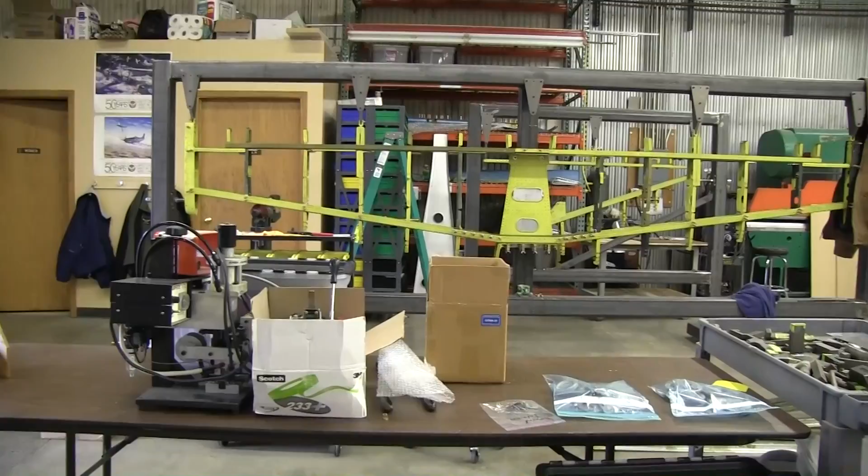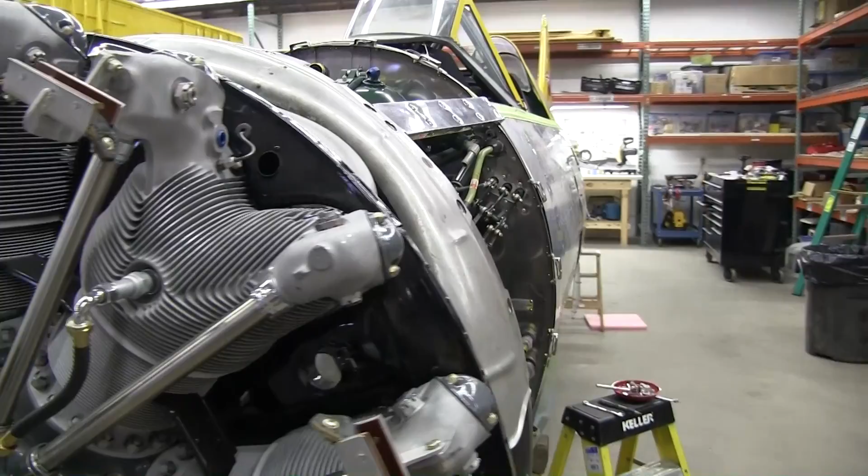During World War II, the United States became the largest producer of aircraft that the world has ever seen, or will almost certainly ever see again. On the eve of the war, the American aircraft factory was a quaint job shop, where aircraft were virtually handmade by the craft method abandoned by the American automobile factory a generation before. Within just a few years, it would be transformed into the largest single industry in the world. Among American industries, the aviation industry rose to first place from 41st place.

Prior to World War II, the American aircraft industry ranked 5th in the world, but during the war it became the global leader, producing twice as many aircraft as the United Kingdom or the Soviet Union, and 1.6 times as many aircraft as the three major Axis powers, Germany, Italy, and Japan combined.

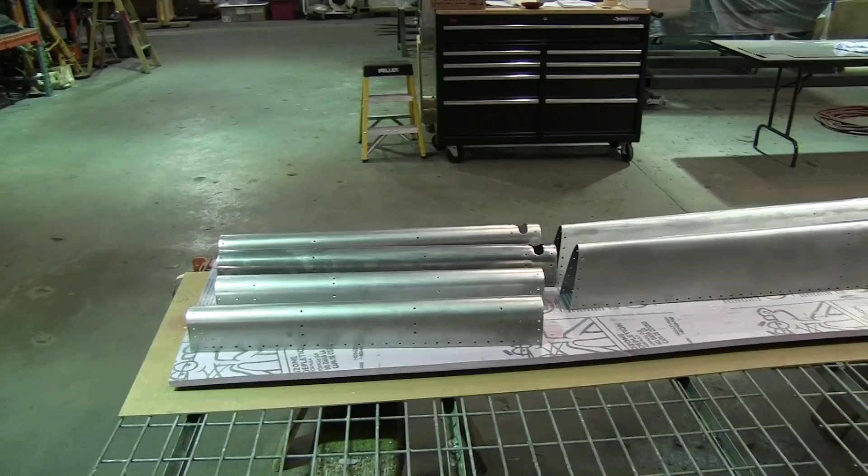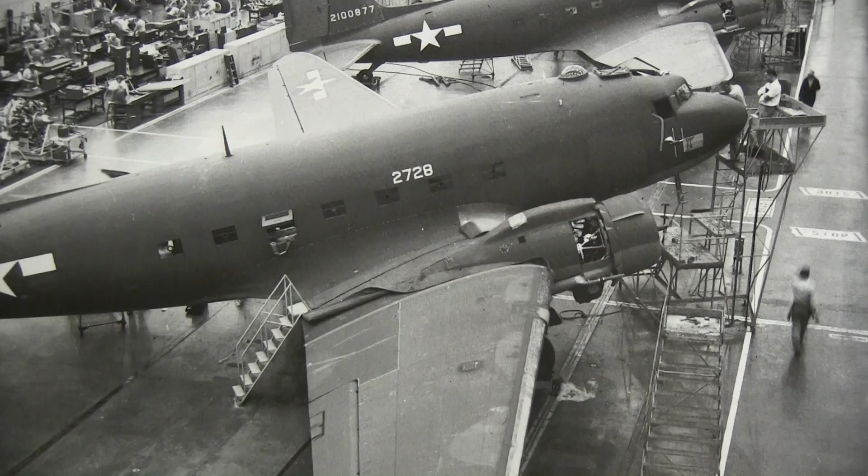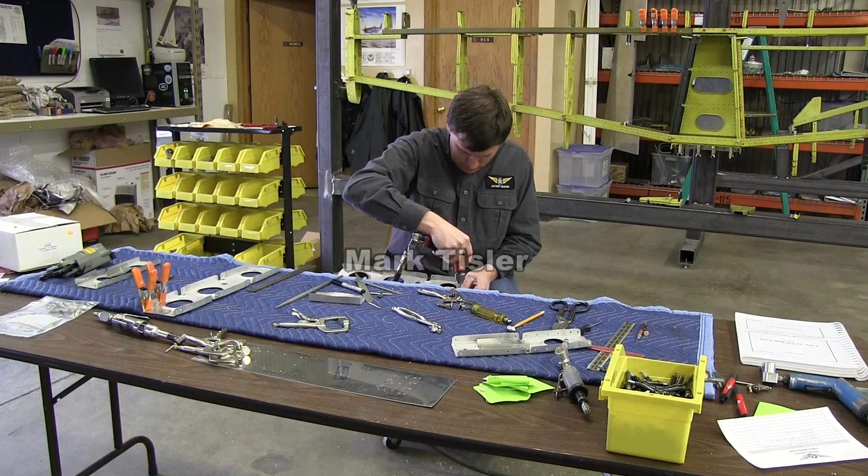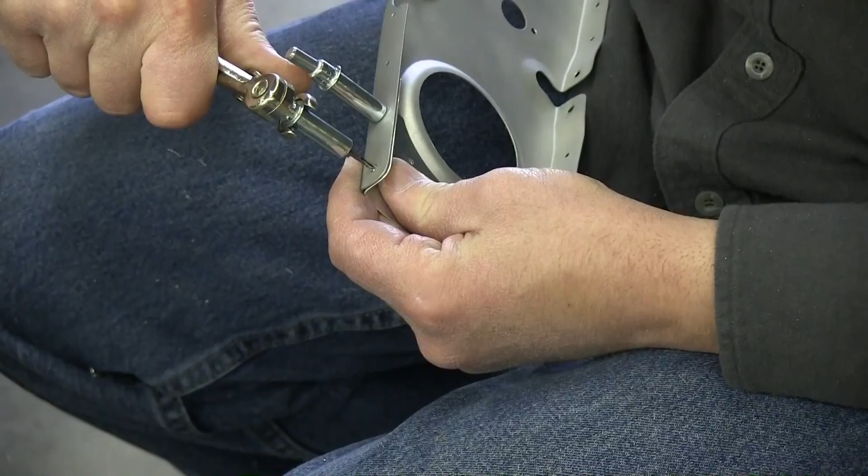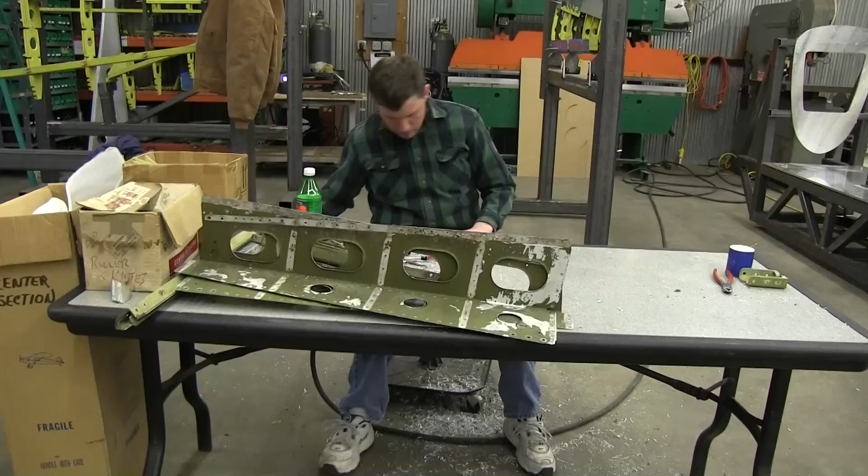First and foremost are the airframe manufacturers, which were and are the largest component of the industry in terms of employment, dollar volume, and sheer weight of their output. Second are the engine manufacturers, which were and are responsible for the single most complex component of any powered aircraft. Third are the subcontractors that provide some assemblies and components. Finally, there are the vendors of accessory and small parts, from rivets and cables to turrets and shock absorbers.

During World War II, the largest airframe manufacturers in the American aircraft industry were Bell, Boeing, Consolidated Vultee, Curtiss, a component of Curtiss-Wright, Douglas, Grumman, Lockheed, Martin, North American Aviation, and Republic.

What is the machine behind you? CNC mill. CNC mill? CNC? Yep. What do you use it for? To mill out parts. Mill out parts. Yep.

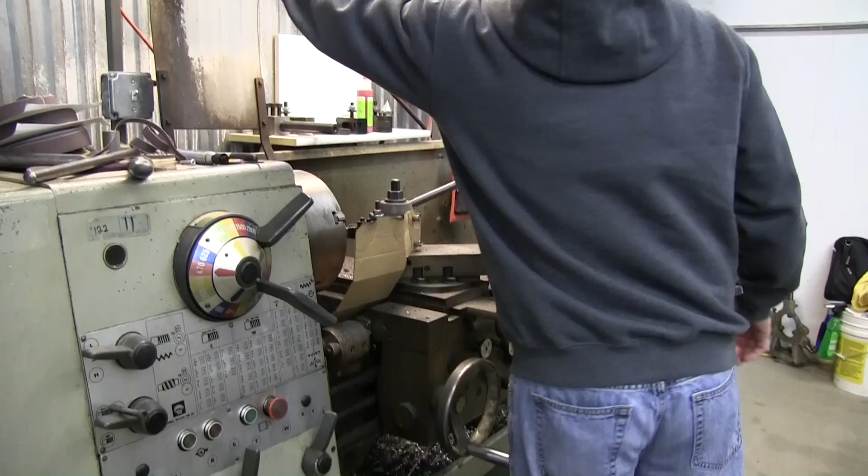The Aircorps Aviation refurbishing facility is located in the industrial park of Bemidji. They would have liked to have gone to the Bemidji airport, but at the time when they needed the space, there wasn't any available at the airport, and today there still isn't. So they're at the industrial park. The plan is someday to move out of the industrial park and be located over at the Bemidji airport. Then they can leave the wings on at least. Otherwise they have to truck it over to the industrial park with the wings off.

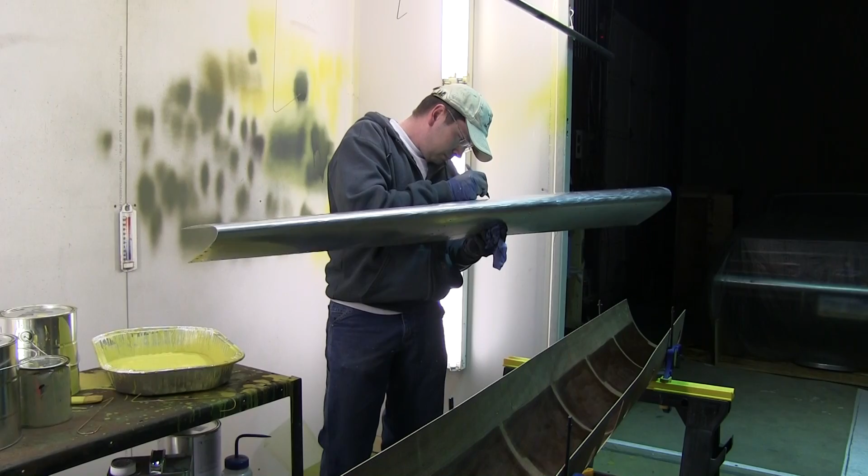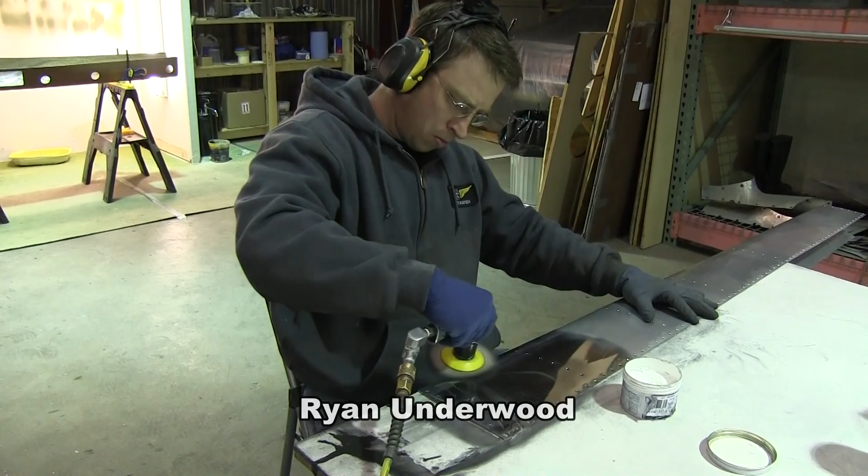What are you checking for? One of the questions that most aviators ask today is, what happened to all these airplanes? Well, a lot went to the Arizona desert and some were destroyed. But there were a few purchased by people like you and I, and they wanted to have them refurbished. There were several places around the country like this facility, Aircorps Aviation, that did just that.

It's actually quite remarkable how good a shape these aircraft are in, considering they were made in the 1940s. And when Aircorps Aviation refurbishes an airplane, they occasionally find a part that's corroded beyond use and a new one has to be milled out. When they finish the airplane, it is better and newer than when it came out of the factory in 1945. And you'll see that as we go along here today. Next, we'll take a walk through the plant with Eric to see how they rebuild these aircraft.

Hi, my name is Eric Hokuff, and this is Aircorps Aviation, and we restore World War II airplanes here, and I'll show you around a little bit. This is a set of wings from a Stinson L5, which was a World War II liaison airplane. Liaison airplanes were used on the front combat lines, and they were an off-airport airplane, so people could hop in the airplane and fly up to the front combat zone and land out in a field somewhere.

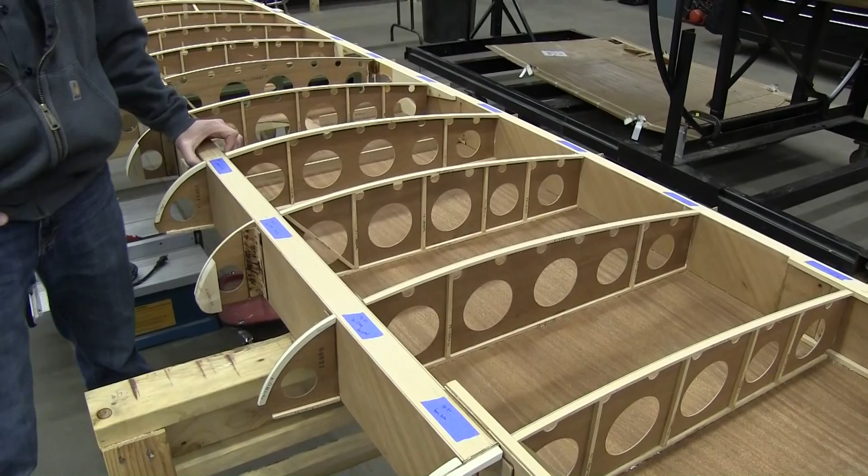So we have to cut and shape the wood to make the wings, and it's kind of like a model airplane, a radio controlled airplane built from wood. It's similar construction, just a little bigger and a little different types of wood, but there are some special techniques that have to be used and thought about when you're building a wing for an airplane, and so we do all that here. So this is a rib on the front of the L5 wing.

These little strips here are actually laminated and curved, so we have to steam the wood, which we had to make special tools for in this particular shape, and steam it and bend it and let it dry, and then laminate it together to create this shape, and then that's glued onto the rib, and then finally finished with a router template, so it has a perfect shape to it. What does that piece do? Strengthen it or something? Yeah, this is the nose rib.

So at this particular location, the plywood is glued over the top here, and then on this wing it has what's called a slot, which is an area of the wing where the air is allowed to travel through to help the wing continue to fly at low speeds. And so that's what this area here is. Plywood goes over here, and there's another piece that comes on top here, and that allows the slot or slat to allow air to go through there. So this is several pieces on this particular rib.

But the wing is, like I said, predominantly spruce and mahogany plywood, but these particular pieces are actually poplar. And poplar is a little bit heavier than spruce, but it's stronger. So they decided to use poplar in this area for a little more strength. And then this particular block, there's a bolt that will go through here, and so they made that out of maple, actual hardwood. But typically we use spruce because again it's strong and very light.

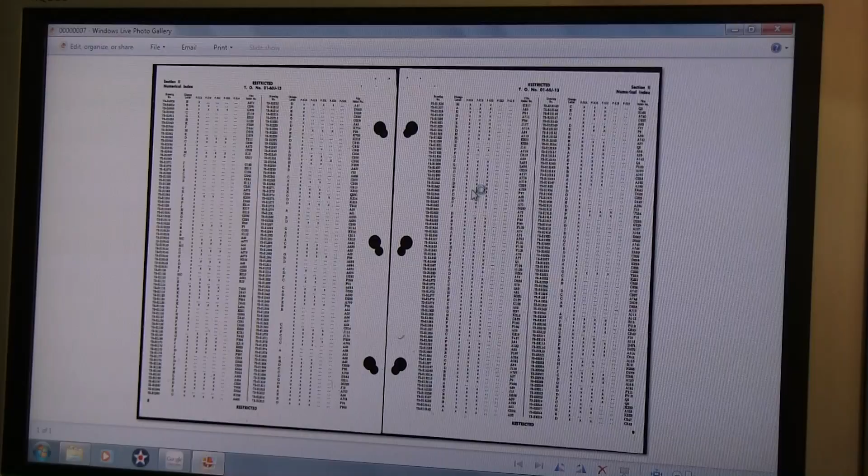So we would use this sheet to find a part number here. Just take this one example. It's on roll P97, that particular part number. So we might come over here and we'll find P97.

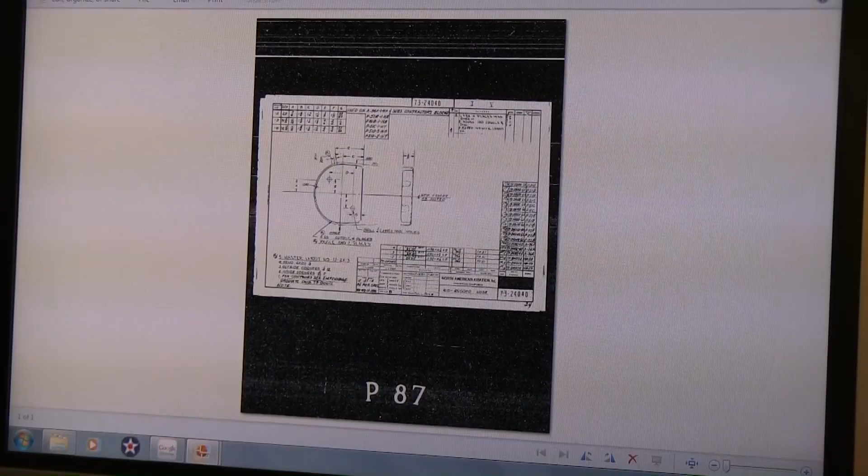Okay, let me hold that drawing. This is actually P87, but you get the idea. We can pull up the drawing, and this gives us all the details for making that part. And so we use these drawings on a daily basis. Every part that we pick up and disassemble and restore, we refer to these drawings to make sure that the dimensions are correct, and get any kind of information like that we might need.

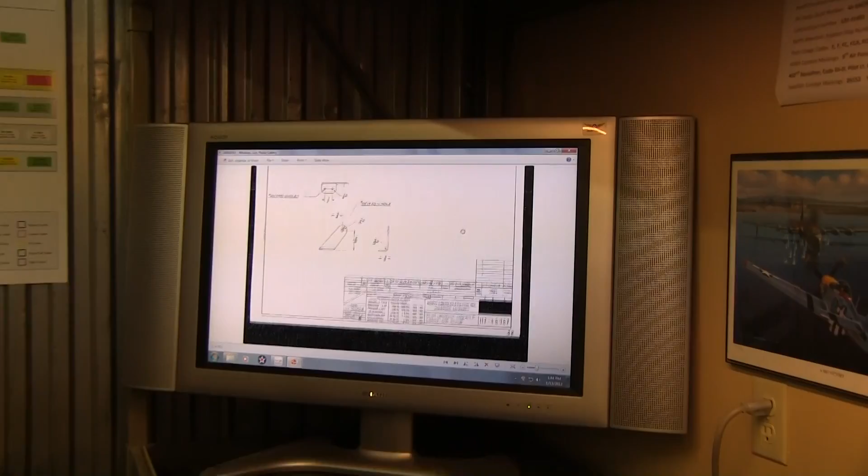There's all sorts of different... Where did you get all these drawings from? Well, originally, the Smithsonian is the best place to find original rolls, and you can actually call them, and they will make a copy of their microfilm and send them to you. They charge you a little bit, so that's a common place for us to get the film from. In some cases, people have already found a copy, and they'll share them with us or things to that effect.

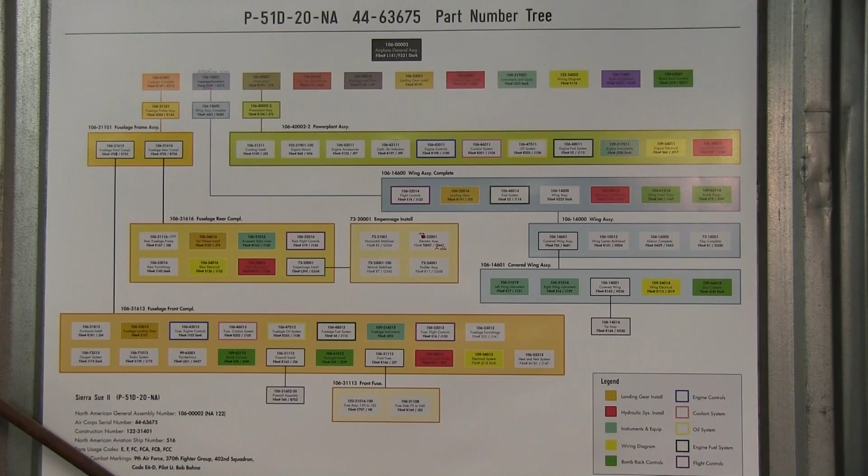So you can see we have all the information we need here on the microfilm and on the drawings. Sometimes the challenge with that is finding what you need in the film, and making sure that the particular airplane you're working on applies to the drawing you're looking at, or vice versa. So we actually organize the whole airplane. You can see that up on the wall here. Here's a chart that we've created on this particular airplane that we're restoring right now. These are all the major assemblies.

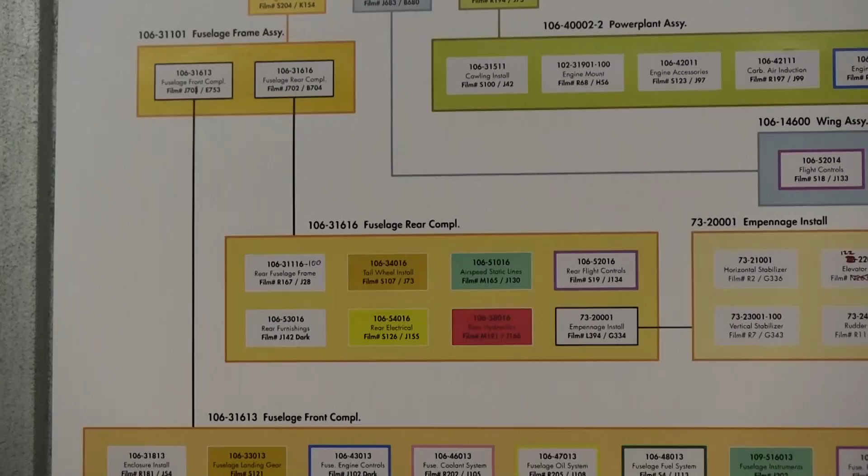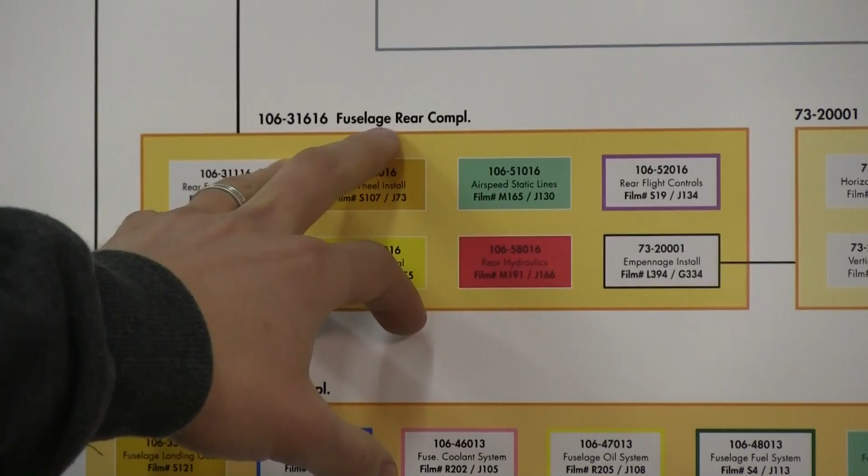Which airplane is that? This is for Sierra Sue P-51 Mustang, and this is what's called a bill of materials sheet or part number tree, and it's what the manufacturer, which was North American Aviation, created when they were manufacturing the airplane. So we actually follow this chart and we use it in the same way, in that this for example is the complete fuselage, and then it takes these two parts to make the complete fuselage, and that's broken down over to here, which is fuselage rear and fuselage front.

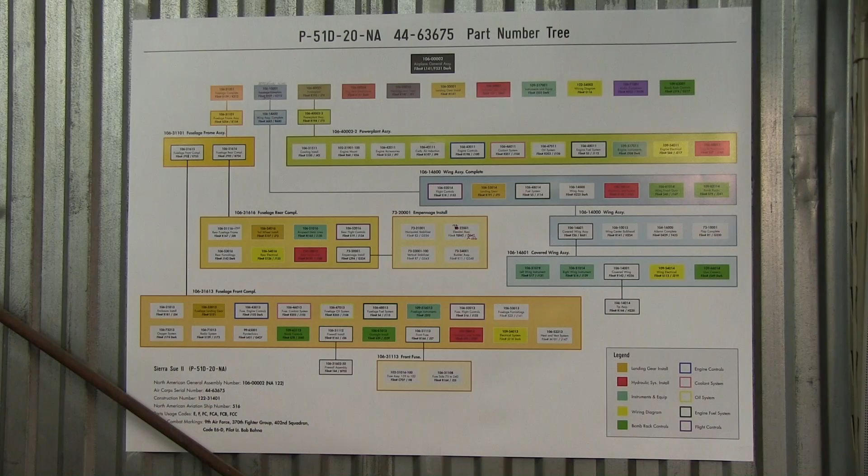And so that's the way that the airplane would have traveled through the factory. In other words, they would have made all of these components here and then assembled them to make this one component here. And they would have taken all those assemblies here and they made this, plus those assemblies made this assembly, and you can see how that all works. So it just breaks it down kind of like a Christmas tree. So we use that on a daily basis to help us locate the drawings and make sure that we have every detail of the restoration correct.

Okay, this is the horizontal stabilizer for the P-51 project Sierra Sue, and you can see that it's in process going back together right now. It was all disassembled. Some of the parts required replacement because of either cracks or corrosion or various things like that. And so these are new manufactured parts that are reinstalled, and we're using original finishes in every respect in the way this is going back together.

You can see how there's 3 different colors here that are used, and that was the zinc chromate primer. And today there's only one manufacturer that makes zinc chromate primer anymore, out of California. So there's one source. So that's the original paint, exact same stuff that was used in 1945. The colors are different because they had different tints. They would add some paint to their yellow zinc chromate. That was the natural color of it, so you see that kind of the most.

But they would add black paint so they could see they had a different color when they might paint 2 coats on it. And what ended up happening in the factory was that if they were out of yellow, they would just grab the can of green and spray the part with that green because they didn't have time to wait for more yellow to come along. So there was kind of a random mix of colors between this color green and this color green and this yellow.

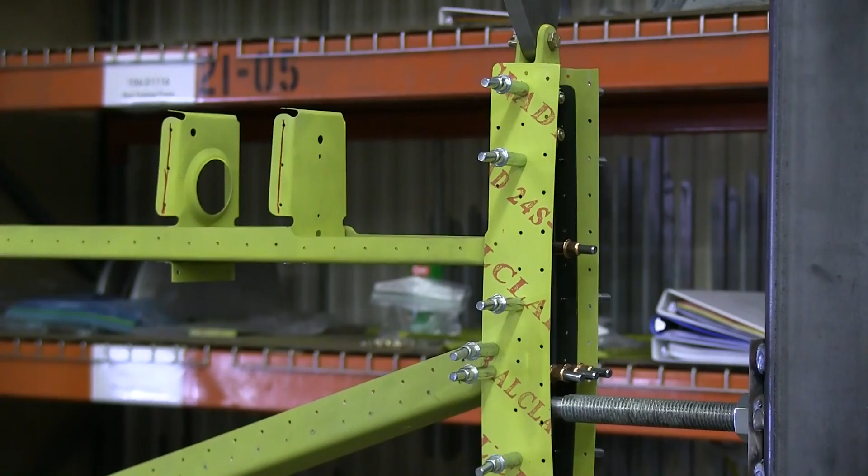So we have shelves organized with the different components. You can see that each shelf is labeled, so we stay organized, so everything gets back to where it should be. As this gets built up, of course, fewer and fewer parts are on the shelf.

We have books that we actually record every part that goes into the airplane. When the restoration is finished, we'll know if that part was original, in other words, it came out of the factory in 1945, or it might have been a replacement, or if we had to repair that part. So there'll be a complete documentation of every part in this airplane when it's all finished.

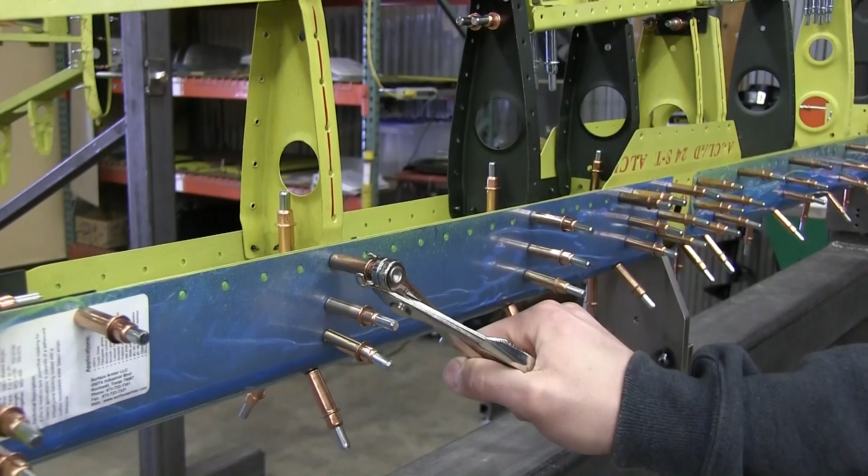So this is the elevator off of the P-51 Sierra Sue, and it's also in the process of being reassembled here. It's back in the fixture, and you can see that we're using these clecos that hold it together before we put the rivet in. So you can see we use these special pliers, and that goes in the hole, and then when you release it, it clamps it tight.

So what we'll do is there'll be a cleco in the hole, and we'll put a rivet right next to it, and we'll rivet these holes, and then we can remove the cleco and put the rivet in place of the cleco, and then pretty soon the whole assembly is assembled. So that's what these little copper looking guys are. There's different colors to identify the size hole that they hold.

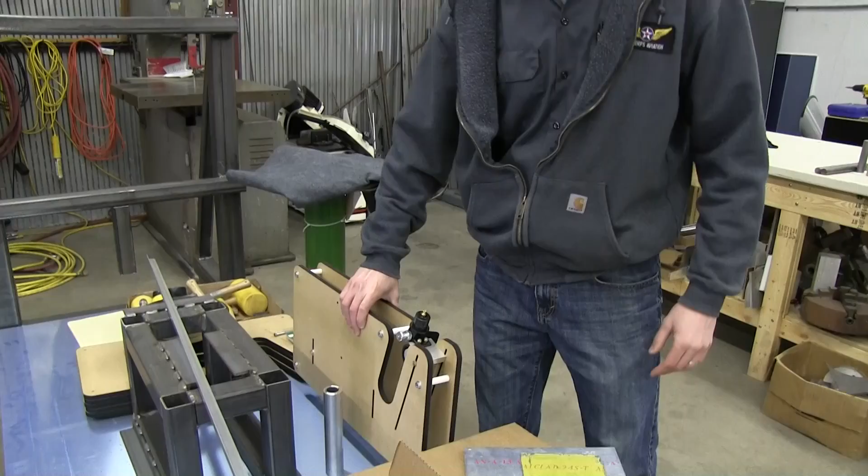This is another example of some tooling that we're making. This is going to be a machine for applying a rubber stamp that was originally on the airplane. You can see this is an original panel off the airplane that was just simply removed, and we have to reproduce that stamp so we can reapply it to the skin, because the original skin had these stamps that were marked on them. So that's what's going on here.

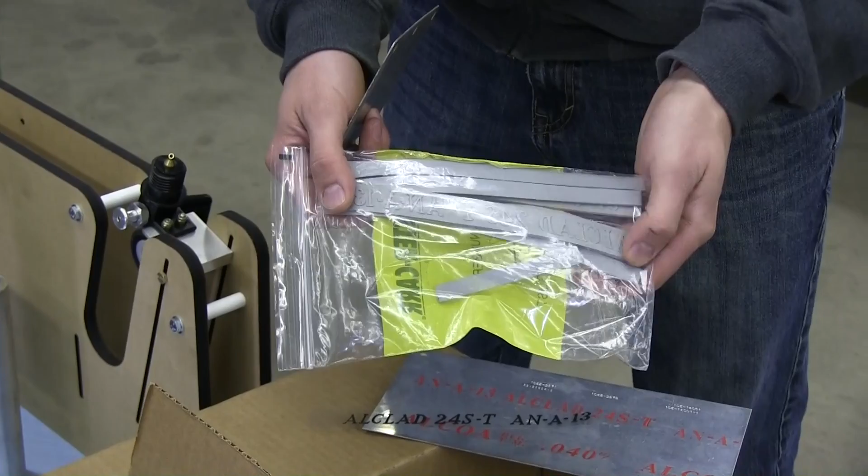So we have to draw that stamp on the computer. You can see here's kind of a little sample as we're working on it to show that it's exactly the same. And then we reproduce that into a rubber stamp here, and then that stamp gets glued onto this wheel, and then that wheel will go into this machine here and reapply the stamp onto the big sheets of aluminum, just like they were in World War II.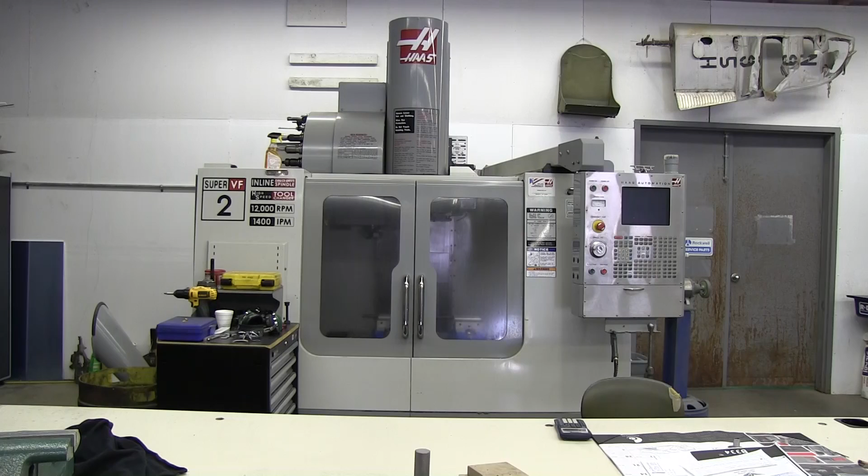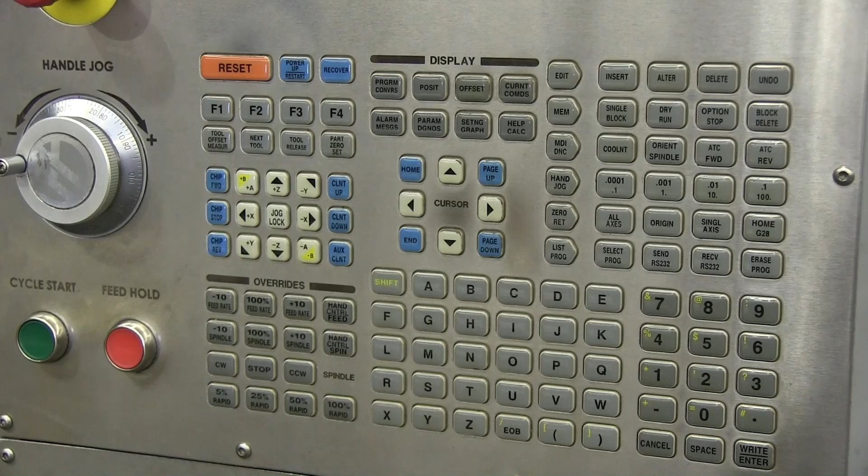So when we're restoring these airplanes, we use some modern technology to help us rebuild the parts and manufacture tooling that allows us to complete the restoration. And this is a CNC machine, which means that our machinist, Dan Matichek, takes his computer and uses original drawings, and he draws a part or a tool on his computer, and then using that information he can program this machine, and it will go around and cut out parts out of metal, or in some cases we use it for cutting plastics and woods and things like that.

But it makes precision holes fairly easily. Back during World War II, they would have had to do the same processes on a hand machine, where they had hand cranks, and they had to use measuring tools to verify that they cranked the right number of turns on that machine that was cutting the parts.

And so it was very tedious, and the solution for them was to have 10 different machines. So every step in the process the part can just simply be passed down the assembly line. So there's only one process per machine. Obviously today with a machine like this, we can do 10, 15, 100 or more. There's really no limit to the processes with the same machine. So it makes things a lot more efficient for us and allows us to do a really nice job when we're restoring these parts.

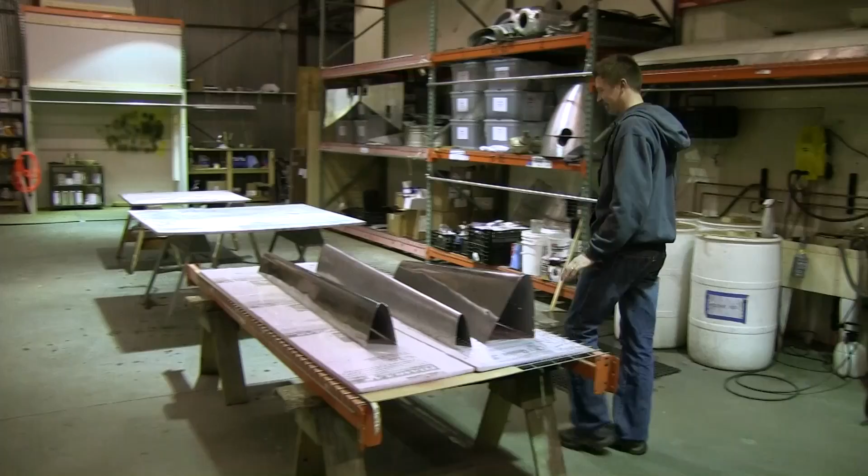So these are the original skins off the airplane, and over the years the aluminum had been kind of dented and scratched and things like that just from normal wear and tear. So we spent a lot of time salvaging these parts and carefully removing the dents and the small scratches, and we want to try and save as much of the airplane as possible. So we spent a lot of time actually repolishing these parts, and the idea is to bring it back to the original finish, just exactly the way it would look in spring of 1945.

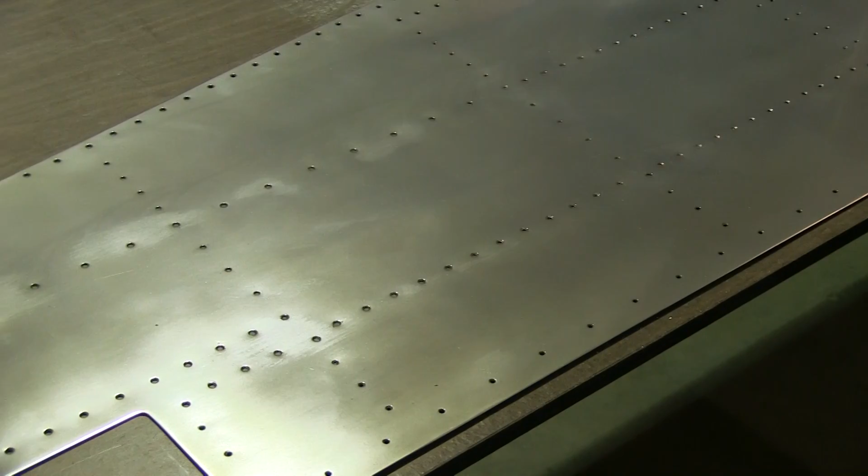So this is a skin off of the horizontal stabilizer that you saw in the fixture earlier, and the guys are working on restoring that skin back to that original finish, removing all the little scratches and things like that. So right now they're working on polishing and buffing that out, and wet sanding with real fine sandpaper to remove those scratches.

You can see all the particular holes in here are where the rivets go, and you can see that those holes are all countersunk. So each hole you see is a rivet, so you can see there's a lot of rivets that hold all this together, and they'll all have to get put back in again to reassemble it. So with the rivets we go through a lot of detail. We actually had rivets made to the 1945 specification.

Those rivets at that time were a different color, and actually, it's what they didn't have that was special. They didn't have the marking from the manufacturer in the head. At that time period, there was a mark that identified the type of material and the strength of the rivet, but it didn't have the manufacturer's logo in there. So today we had rivets made to the 1945 specification. So the rivets are the correct color and the correct marking on the head, and all those things take a little bit extra time in the restoration to make sure it's just right.

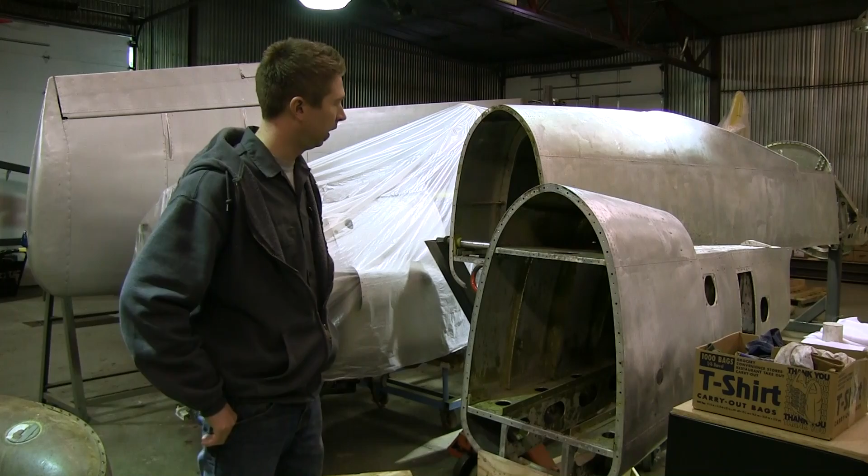So this is the fuselage and tail cone, we call it, for Sierra Sue, and we've stripped all the paint off of it. It was painted in the 70s, and we removed that paint so that we can see all the rivets and the different parts, and it's getting ready to be disassembled. Dan, the machinist I was talking about earlier, is in the process of making the fixture to hold this while we take it apart and restore it. So as soon as that's finished, all the rivets will come out, and it'll go back together again and look like the other components you saw earlier.

Same with the fuselage. That'll be after the tail cone, and they're going to strip the paint off, and that's allowed us to look at everything and get a brief idea of the condition of the parts. And so once we have a fixture made, all the rivets will come out, and all the parts cleaned and inspected and reinstalled. What are you doing to the inside to get the zinc chromate off? Well, we've just used a paint stripper to remove the paint that was painted on it in the 70s, and that just allowed us to get the bulk of the paint off so that we could see the individual rivets, so that they can be removed so it can be disassembled.

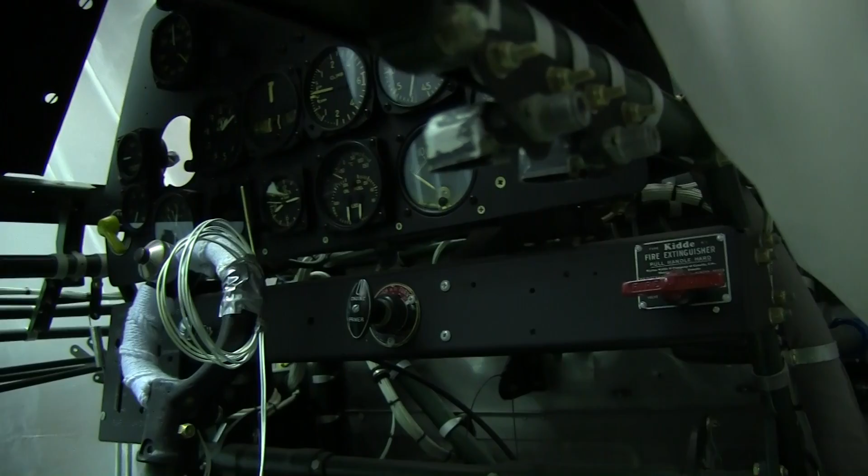So this is an upcoming project. It is a Canadian-built Harvard, which was the Canadian version of our AT-6 Texan, which was a common advanced trainer during World War II. And this airplane, the restoration is about 80% complete on it, and we'll be finishing the last 20%. And so this fuselage and all what you see here has already been restored and ready to go. That's why we have it covered up with plastic so we don't get it dirty in the meantime.

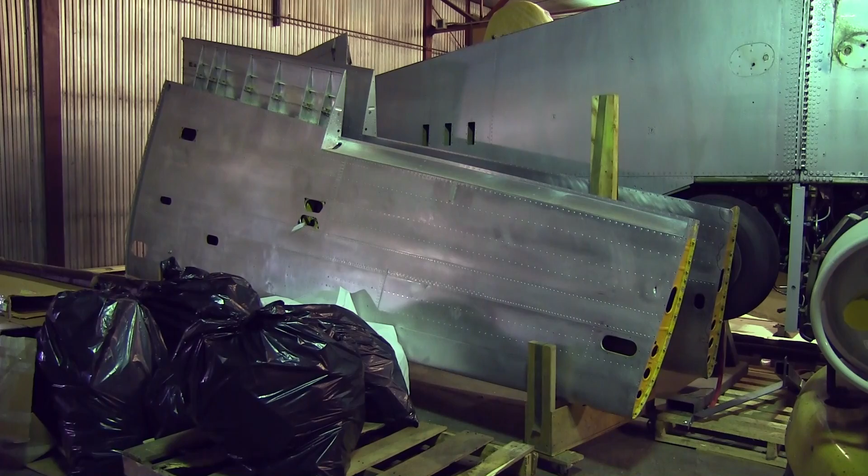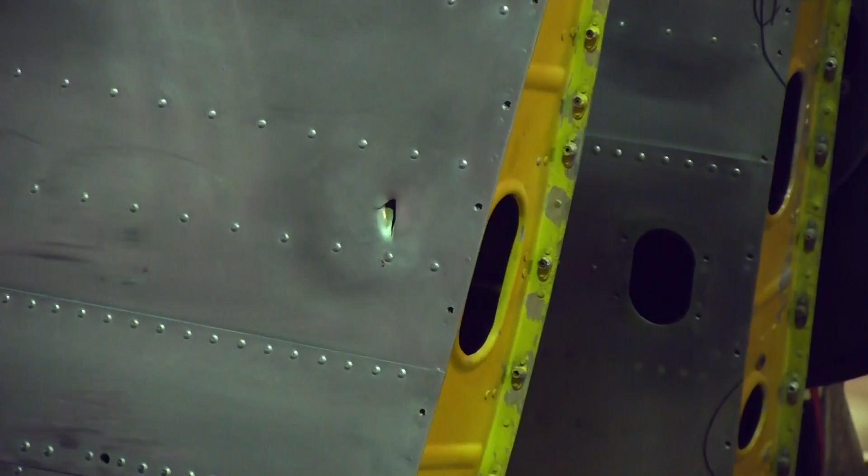Those are the wings for it? The wings next to it here, those are for Sierra Sue, the P-51 restoration project. So the wings for the Harvard are actually on the other side over there, and being worked on by an outside shop. So these are the wings for the Harvard project, and they're awaiting restoration. The paint has been removed from them, and they need some sheet metal work. You can see there's a hole in the sheet metal, and so that skin will get replaced, and then the wings will get painted and reinstalled on the project.

This is a drop tank that was used on the P-51 Mustang and the P-47 Thunderbolt and P-39 Airacobra. It's kind of a universal drop tank, and that was attached to the bottom of the wing, and the pilot could release it if he got into combat with an enemy fighter, or he needed very extended range, and they would use the fuel out of there first, and then they would drop that tank to reduce the drag on the airplane, so that they could make it on a long mission without running out of fuel. So you can see this tank, we just purchased this tank, and it's awaiting restoration.

Who came up with the idea of having an aircraft restoration business? Does it just fall out of the sky, or a dream of you or your brothers, or what? Well, it started for me with an interest in World War II airplanes, and then I had the ability to work for a fellow who had a collection in southern Minnesota, was able to gain experience particularly with World War II airplanes, and then about a year ago or so had the opportunity to move home to Bemidji, and joined up with a few other guys, and we started Aircorps Aviation in Bemidji. And you restored aircraft someplace else before you got this going? I did, yep.

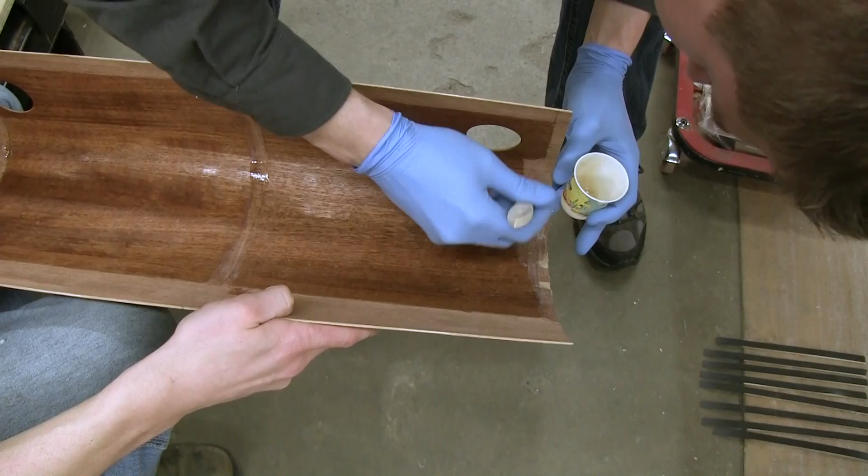At this point, I would have liked to have talked to Eric and Shad Hokoff here. Eric has got the glue brush and the blue gloves to explain what he's doing by putting the glue on this mahogany that's going to be the leading edge for the Stinson L5 wing. One, he was too busy to be talking to me at the time, and it was also just too noisy in the shop.

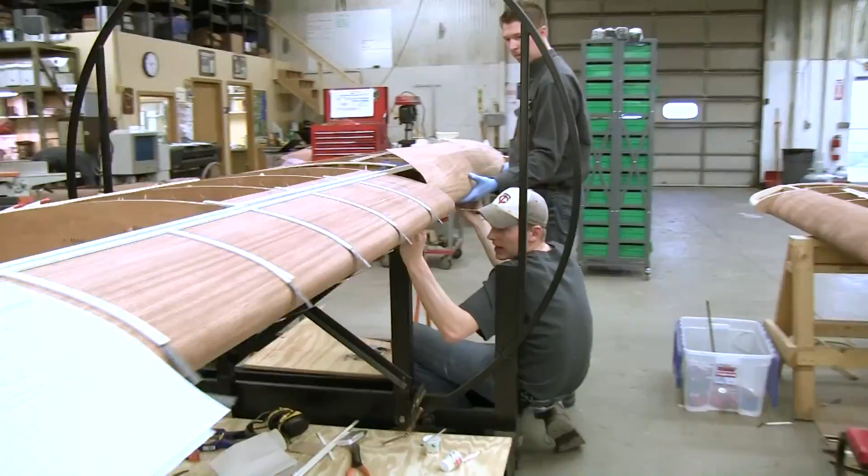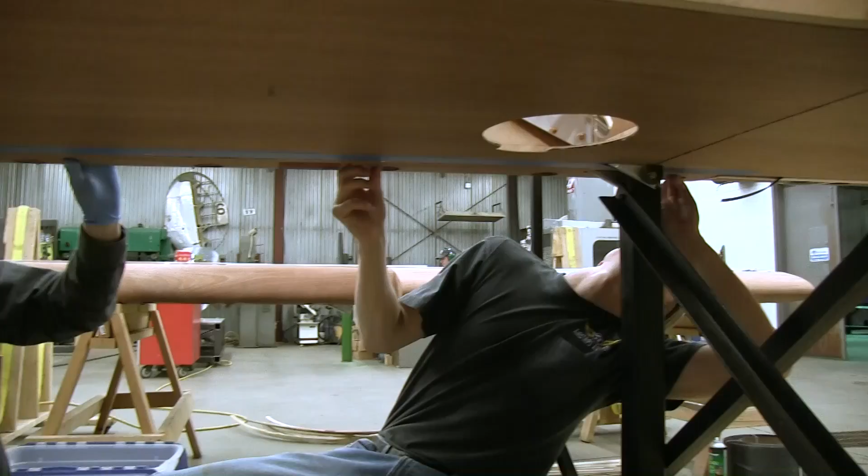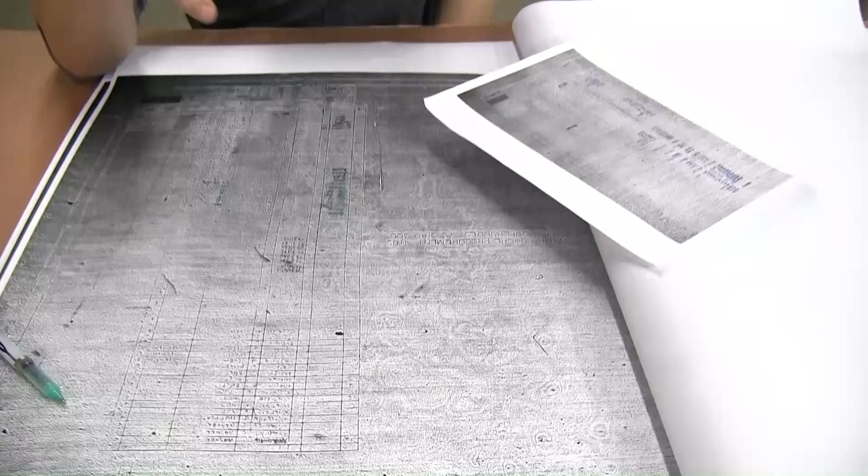What are you working on, Eric? Just kind of organizing the rebuild of the tail cone for the aircraft. The microfilm is deteriorated so bad that the bill of materials for that particular component is illegible. Well, you can't even read it. Yeah, well, you can't read it, so what do you do in that case? What we'll do is we'll print out in a 42-inch print the various drawings, or the major drawing, and you can come back here and have to reference back and forth.

So this -6 longeron left hand, 1 required, -7 longeron right hand, 1 required. If you go back to the book here, you've got your -6, which you can't read, -7 that you can't read, but you can reference back and bring it all together here. And then what we'll do is put it into a book here to kind of track our work on that actual component. So if we've cleaned, inspected, whether it requires replacement, repaired it, reinstalled it, and then any of the notes that we have on each of the parts. So we can actually go back and trace each of the parts that are or have been used in the airplane and what we've done to them.

That sounds like it's time consuming because you can't read the print. Yeah, the microfilm, the problem has been that over time it's not made to hold up over 65 years, and despite the fact that it's been digitized and that it's readily available on a computer, the condition of the microfilm has just increasingly become worse and worse over time. They digitized it from the microfilm, so it isn't really better on the computer then. Right, and that's part of the inherent problem: this film has been duplicated 4 or 5 times over the life of it, and as it's been duplicated, it loses about 8 to 10% of its image quality. So then they've scanned the poor version of the microfilm and put it on the computer, so it's not much better. And it's really one of the only versions of the particular film that's available. So you just got to work with what we've got.

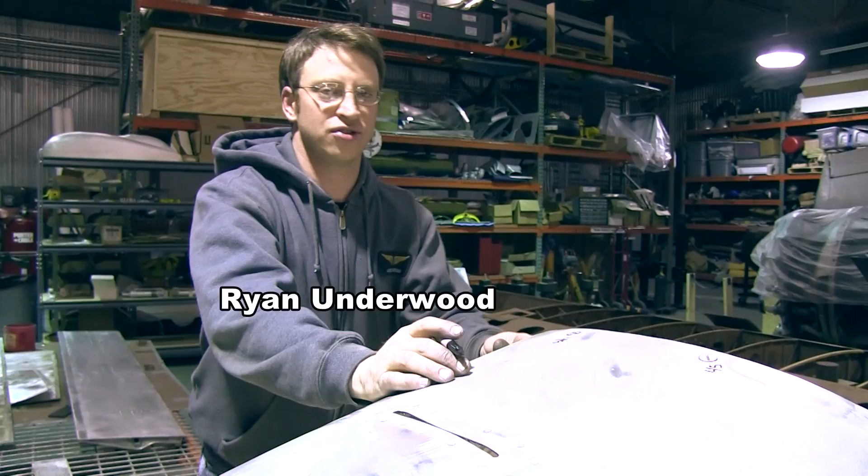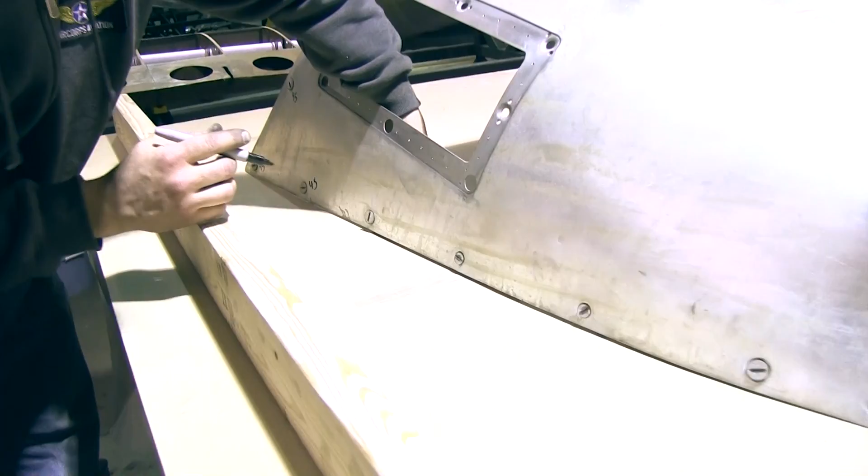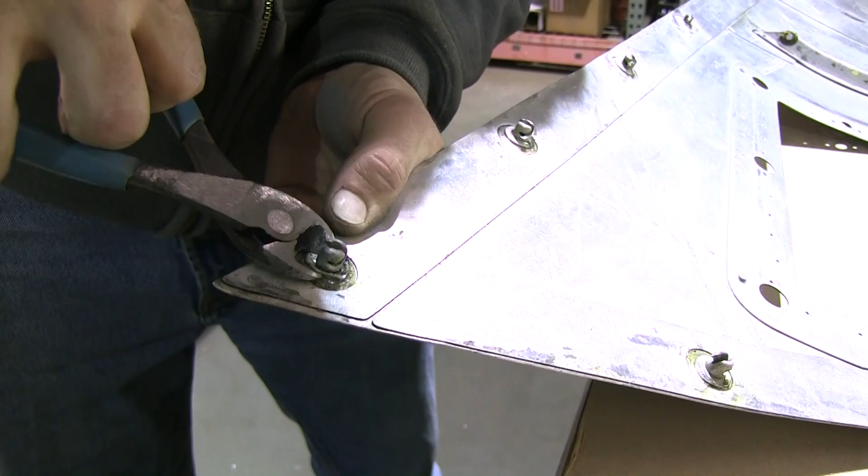Yeah. Thanks. So these are Dzus fasteners. They're quarter turn, quick release fasteners. We're taking them out to blast them and replate them. And I'm just marking the lengths so we get them back in the right spot. Got 100 of them now. You can get it, pop them out. Should I step back? Oh, you're right. We've tried to make fancy tools to drill them out and everything, and no improvement on an old pair of side cutters.

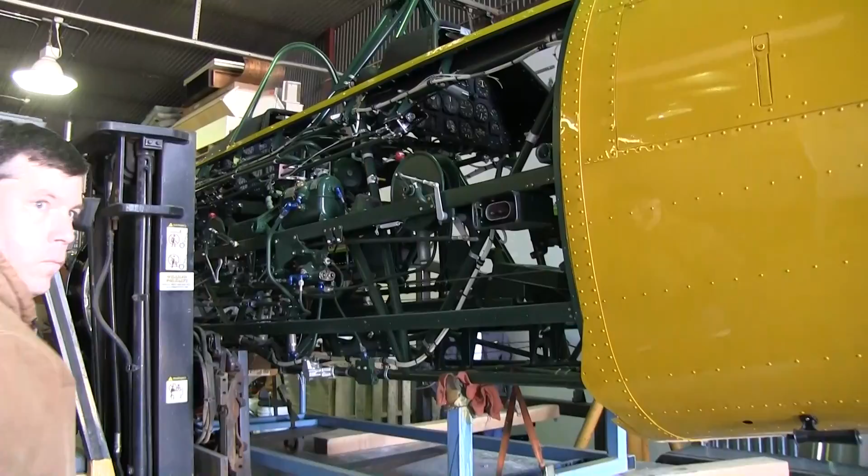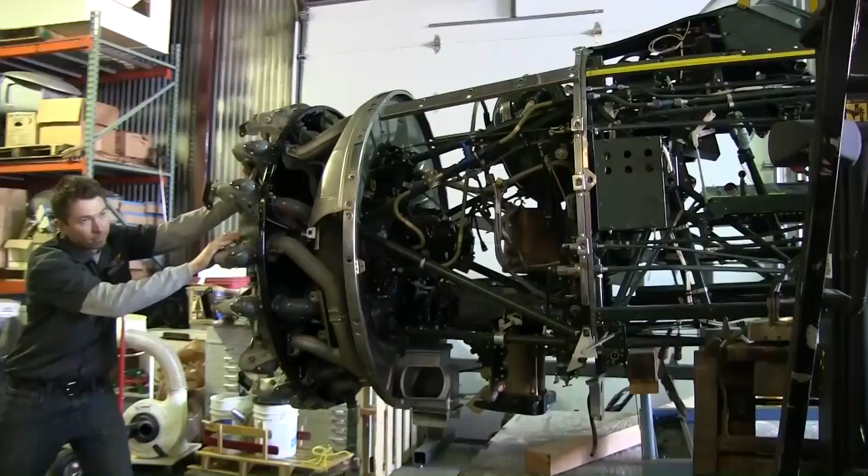Might be a good thing. Well, the other option is... Can I go out? Yeah, I'm really not doing it here. I got weight here anyway. Over a rail, you can go forward. What's that? Okay, it's two legs, right? Yes, right. Done?

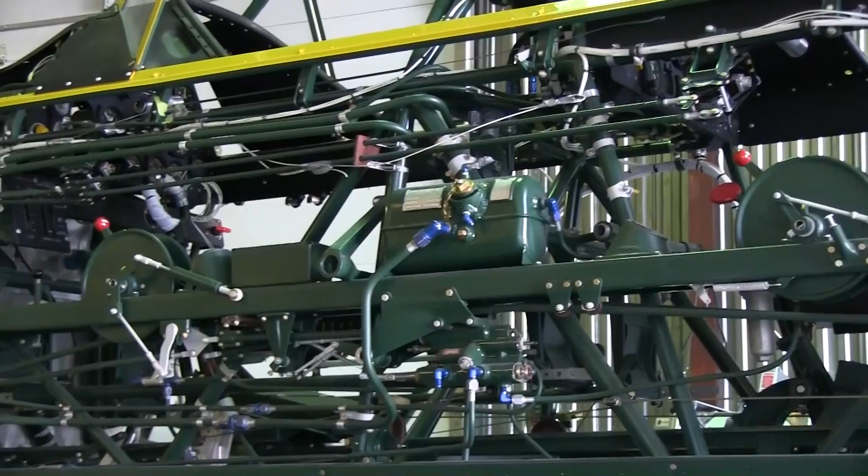Okay, yeah, that'll work. Did you pull this whole thing apart? Yeah. Every piece had to come off? Started off, we were just going to try to patch it up and make it go, but the more we looked at it, the wiring was bad and there was rust in the frame.

So you're telling me that every piece had to come off one at a time, so you know where it goes back in again? Well, we took it off in sections, like big shelf pieces in one section, but then after that we just tore it clear down to the bare frame. Do you have any spare parts left over? There's always a couple. You always lose something and you order three more.

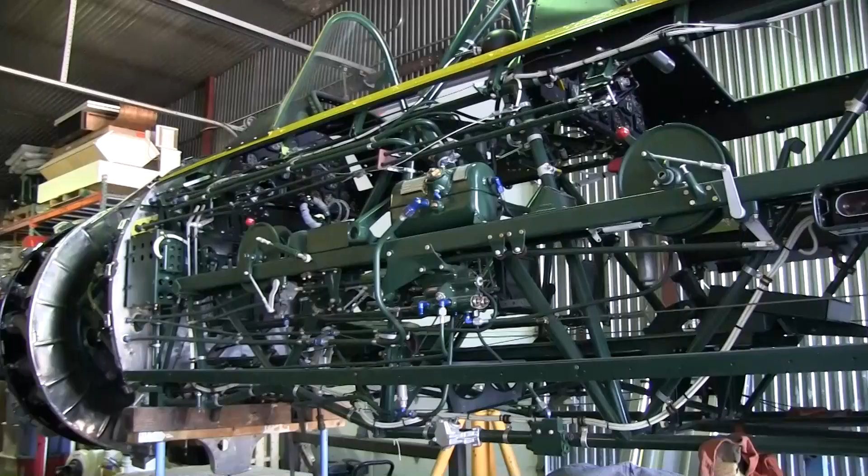Once the airplane was secured to the trailer, out the back door, around to the front door, on a cold winter Minnesota day with blue sky. It wasn't that cold, actually. It was above zero at least.

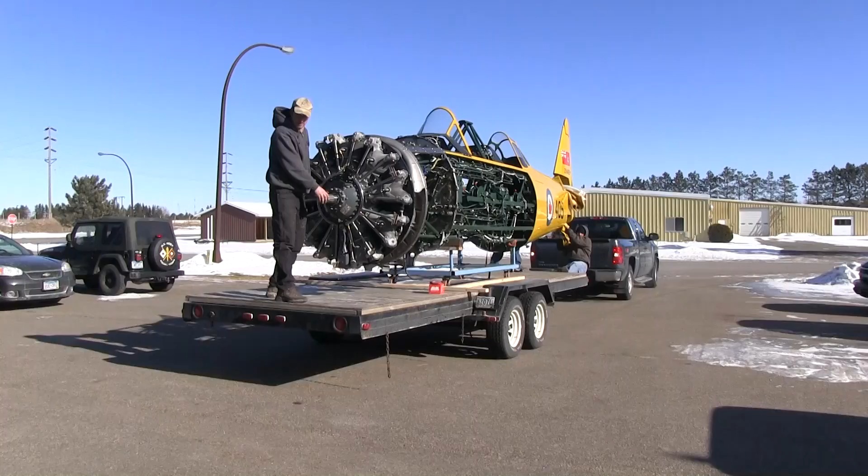Want to hug this side? You're alright, we'll just yell if you're getting close to the tail. Straight back and pick it off, right? Yeah, we want to hug this side.

I think we're going to have to put the tail up in front of this beam here in order to get it off, right? We can close the garage doorways. Well, we're going to go real high to get off. Yeah. Okay. Or back into you. Want to keep coming all the way? Good. They could go down with the door instead. Well, that's good. But it's okay.

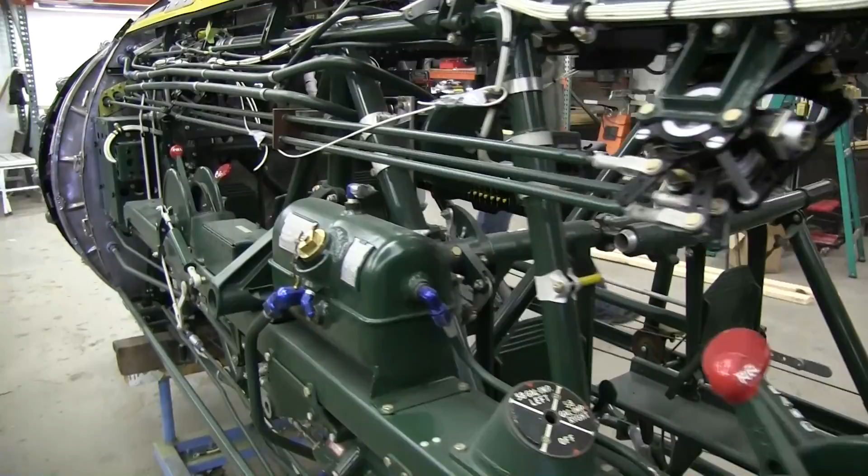You got to get close to this airplane to really appreciate the superb workmanship. Can you imagine taking all this apart and getting it back together and not have one piece left over? I couldn't do it, but these guys can. It's a work of art, and I can see why the owner is excited about coming here once in a while just to see what the progress is.

Before you put all the skin on the side of the airplane, it's really kind of fun just to walk slowly around and look at everything. Of course, you have to be an aviation enthusiast to do that.

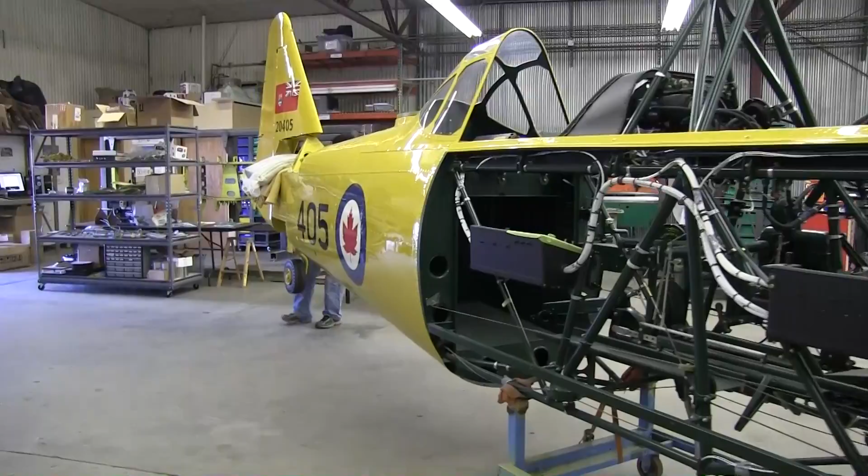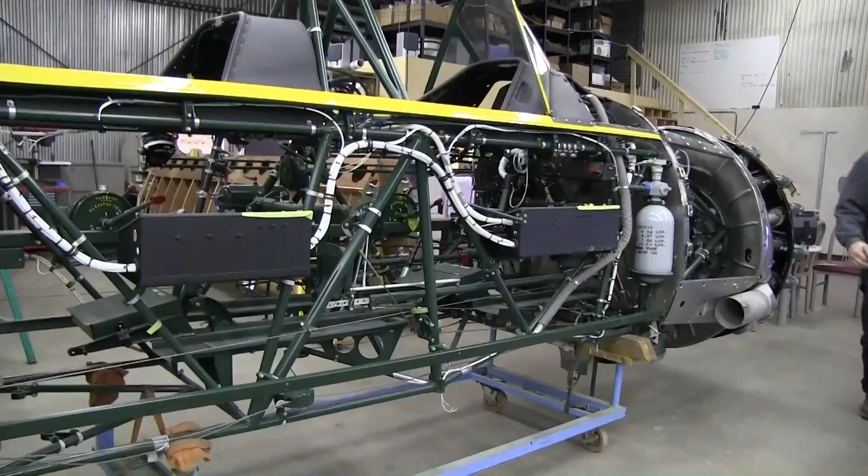But come straight forward. Good. And turn. Want it over here? Yeah, I guess I don't know where we want it exactly. Want to hug the side? Smaller back there. Center section right there. Yeah. Right here, good job. Oh. Yeah, that's a very cool thing.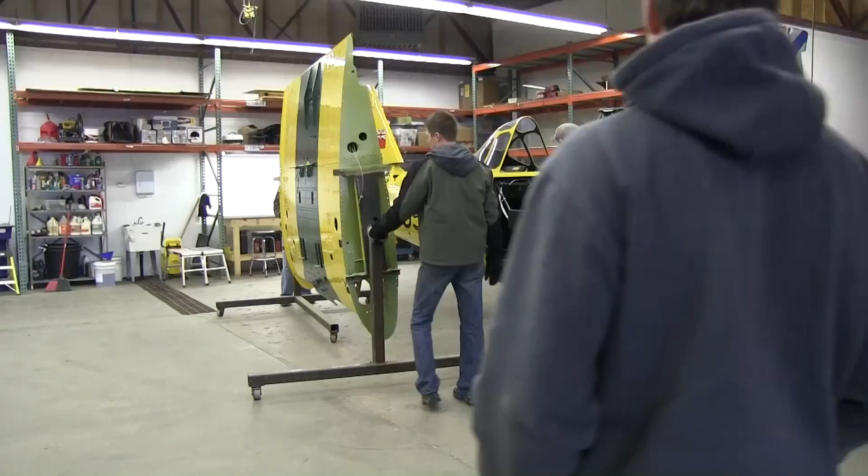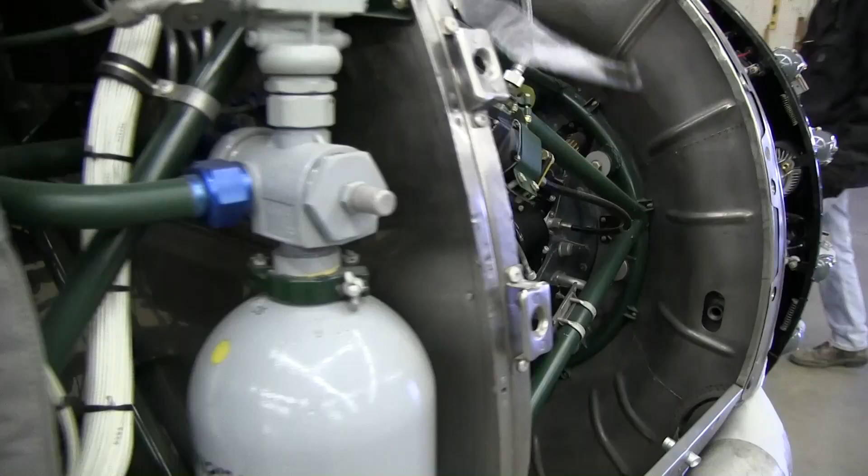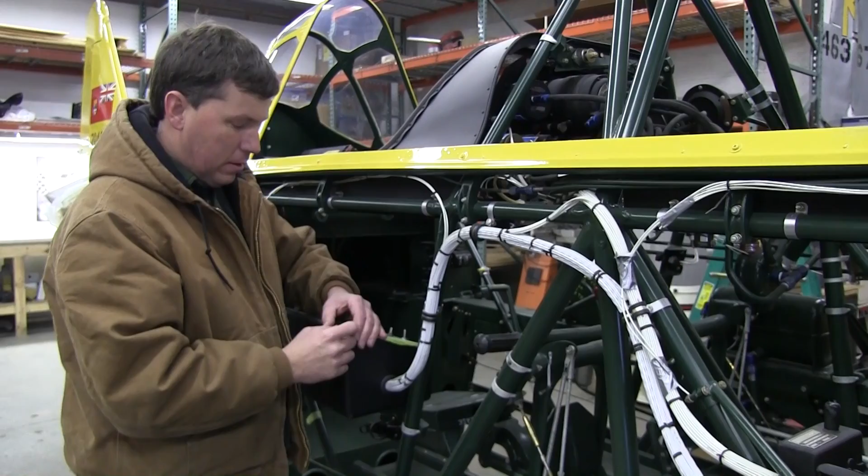Alright. Mark, some questions. Why did you move the airplane from the back in here? Obviously you're going to work on it. What has to be done in here you couldn't do in the back? Well, this area is kind of our final assembly area. It's where all the hardware is and that type of stuff. So it's a more logical place to put it to finish it.

And if we put the tail on it, we can't get it out the back door. So this door up front is wider. Okay. We'll end up putting the tail on it and the wing. What about the wing? Well, we'll put the center section part of the wing underneath it, so it'll be on all three wheels, and that way we can roll the whole airplane out the door and get it on a trailer. And this piece here, what is it?

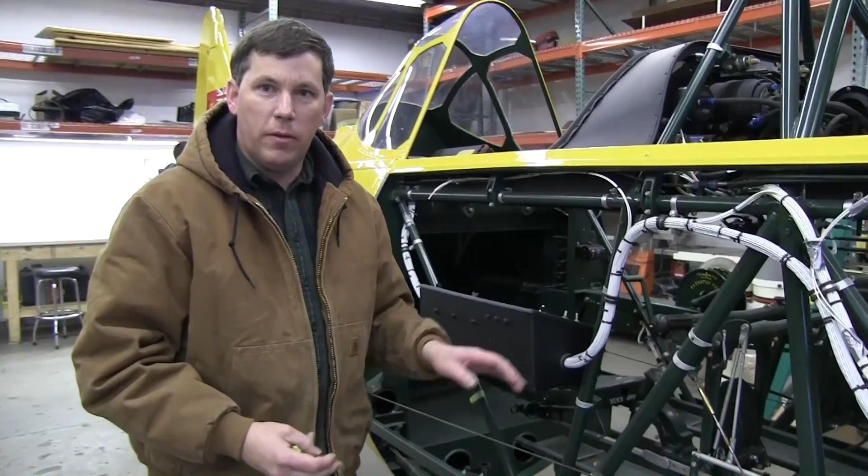This is the center section, the center wing section. It goes underneath the cockpit. So you're looking at the bottom side of it where the fuel tanks and the landing gear go in. Now once you put the wing underneath, you can't get at this here, I assume. Yeah, it's much harder. That's why the factory built it this way, so you can work real easily along the side of the airplane and put all the systems in it.

And then when you're done with the center section, you just bolt the two together, and there's a couple of connections for the hydraulic lines, the brakes, two electrical plugs, and it makes it pretty simple to attach the two pieces together. And then it's mobile, it's on all three wheels at that point for rolling around. Okay, that makes sense then.